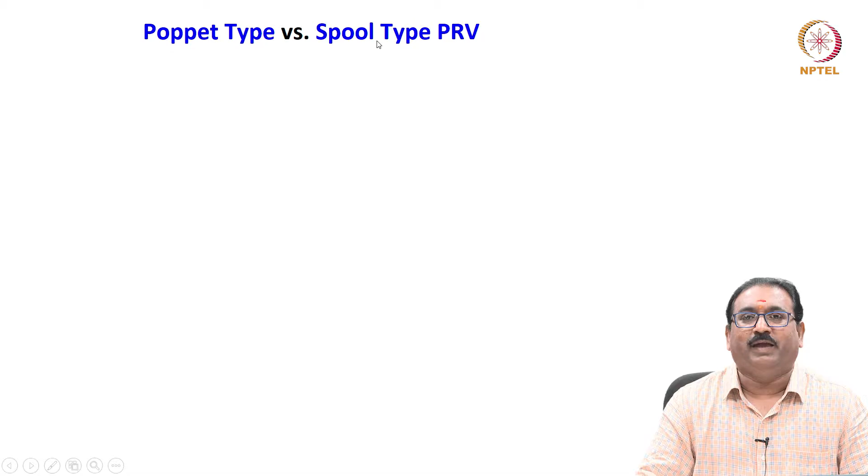Now quickly I will show you the poppet type and the spool type, what are the main differences. This is a poppet over the valve seat, here a spool over the valve seat. Initially the hydraulic balance is there, F hydraulic equal to FF. When this increases, then only it will lift, then flow will go into the tank, otherwise no. Same way for the spool.

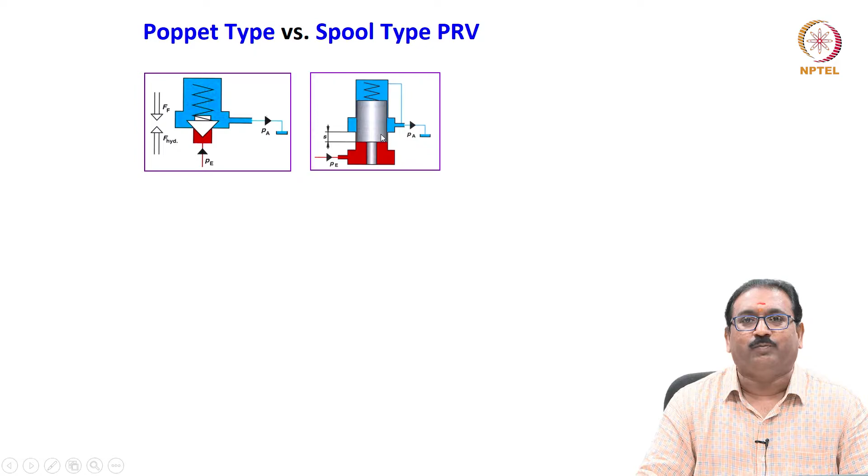The poppet type PRV and the spool type PRV, if you see, the poppet gives hermetic or leak-free sealing. Here oil will leak continuously via the gap between the spool and the valve body, meaning the spool is always moving inside and has a diametrical clearance. Through this oil will leak.

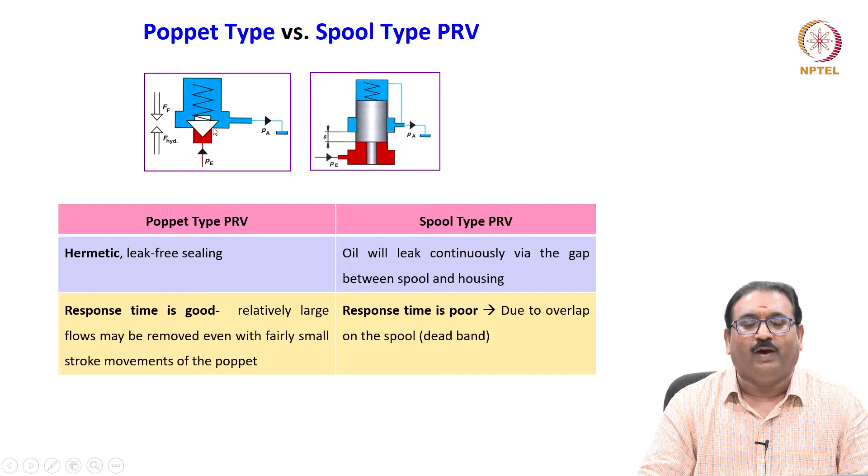Here response time is very good because there is only one moving element. A relatively large flow may be removed even with a fairly small stroke movement of the poppet. Here response time is very poor due to overlap on the spool, meaning a dead band, as you can see, the lap is provided. Until that, the valve will not open, which is why response time is very slow here. In the poppet, no need to worry, it will lift immediately, response time is very quick.

Apart from this, pilot controlled pressure relief valves exist because, as I told you, you have to set the pressure using a stiff spring on the other side of the poppet, ball, or spool. If you want to control very high pressure, for example 350 bar or 450 bar, the spring stiffness should be increased, meaning you have to use a very large spring with a very big diameter. Accommodating this in the valve body becomes difficult, because nowadays people are talking about lightweight hydraulics. Selecting a larger spring, larger diameter, very stiff spring is not allowed in lightweight hydraulics. In such cases, they go for pilot controlled pressure relief valves.

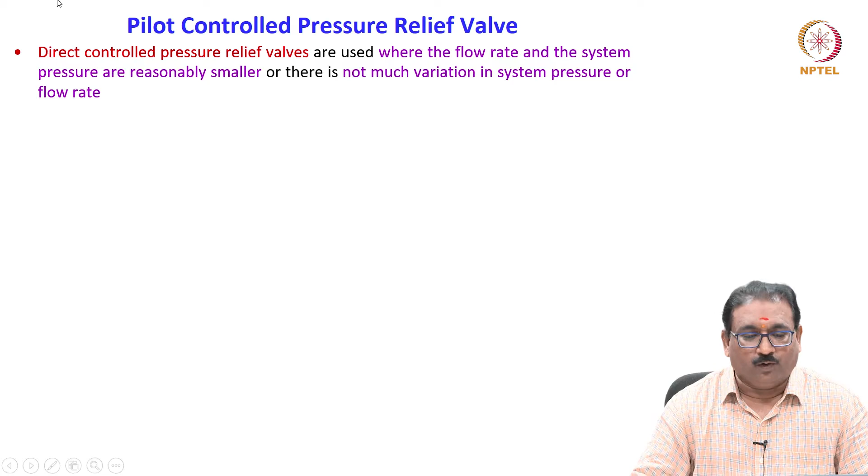As I told you, direct controlled pressure relief valves, which we discussed in the previous slide, are used where the flow rate and system pressures are reasonably small, or there is not much variation in system pressure or flow rate.

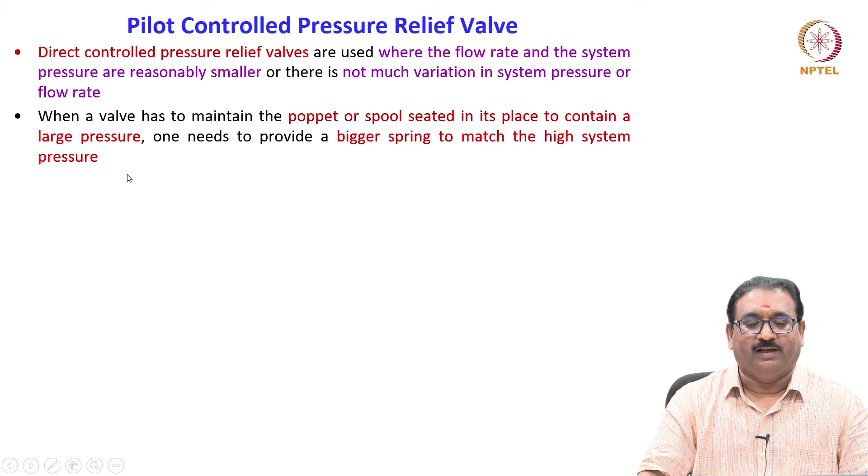When a valve has to maintain the poppet or spool seated in place to contain a large pressure, one needs to provide a bigger spring to match the high system pressure. We know that the bigger spring will have a higher spring rate with its attendant problems, and its cross section will also be larger, requiring more space and sometimes not being feasible at all in a compact hydraulic system as used nowadays.

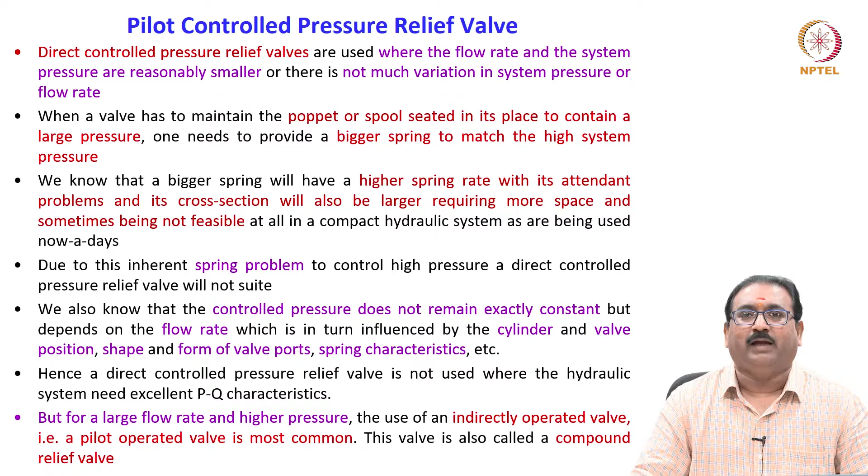Due to this inherent spring problem, to control high pressure, a direct controlled pressure relief valve will not suit many applications. We also know that the controlled pressure does not remain exactly constant, but depends on the flow rate, which in turn is influenced by the cylinder and valve position, shape and form of valve ports, spring characteristics, and many more factors. Hence, a direct controlled pressure relief valve is not used when a hydraulic system needs excellent PQ (pressure-flow) characteristics. But for large flow rate and high pressure, the use of an indirectly operated valve, known as a pilot operated valve, is common. This is also called a compound relief valve. Please understand, friends, compound relief valve is nothing but a pilot operated pressure relief valve.

Now let us see how this looks. First I will show you the poppet type of design, how it is controlled using the pilot. Here you can see the sectional views shown. A pilot operated pressure relief valve consists of a small pilot relief valve, shown here, and a main relief valve. There are two valves here. Generally the pilot is a poppet type, here it is a spool type, and here is what I will call the piston arrangement.

It operates in a two-stage process. The pilot valve opens when a preset maximum pressure is reached. When the pilot valve opens, it makes the main relief valve open.

Constructional detail: I have marked here the whole valve body which has the P port and T port. P and T, T is always blocked using this piston in a stem, with stem, correct here.

On the top you will see what is called a small relief valve setting. The poppet is fitted over the valve body, and this is adjustable type using the adjustment screw. Here you will see the spring, a stiff, larger spring compared to this.

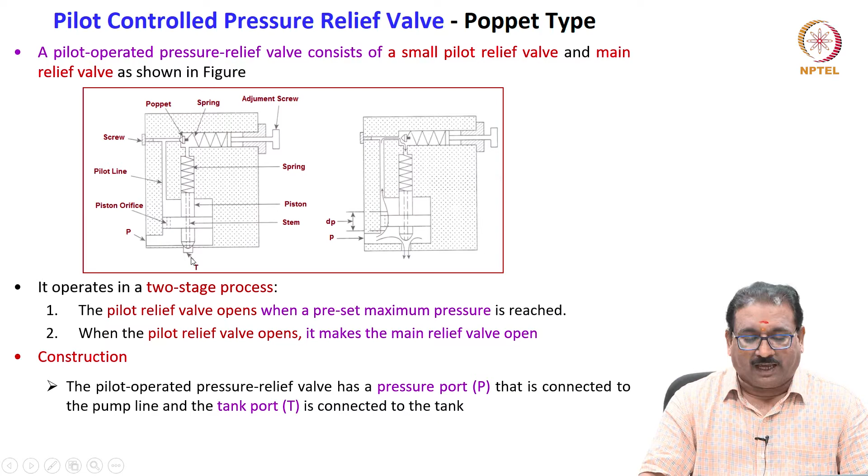In construction, the pilot operated pressure relief valve has a pressure port P connected to the pump line, and the tank port T connected to the oil reservoir. The pilot relief valve is a poppet type.

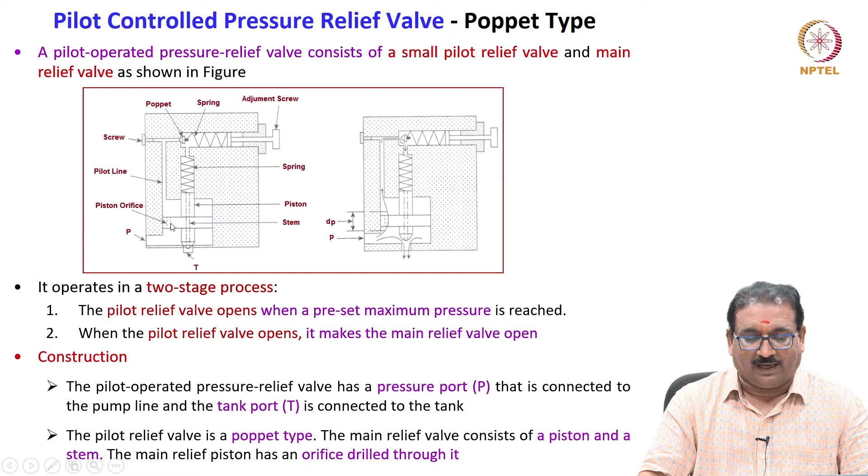The main relief valve, here, consists of the piston and a stem. The main relief valve piston has an orifice drilled through it.

The piston has equal areas, here you will see this area and this area fully exposed, meaning on the top side and the bottom side. The pressure going to the system is acting here.

The piston has equal areas exposed to pressure on top and bottom, and is in a balanced condition due to the equal force acting on both sides of the piston, this side and this side. The oil will enter through the piston orifice and then act over here.

It remains stationary in the closed position. Also, the piston has a light bias spring to ensure that it is always closed.

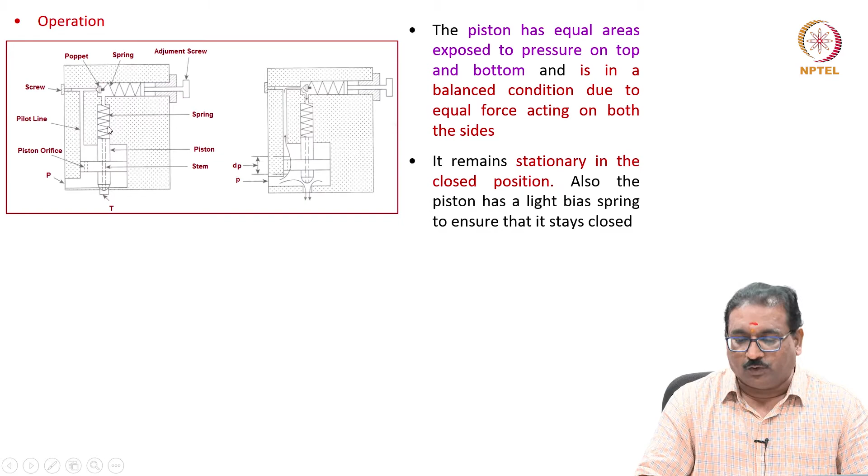When the pressure is less than the relief valve setting, the pump flow goes to the system, as I have told you. If the pressure in the system becomes high enough, it moves the pilot poppet off the valve seat. A small amount of flow begins to go through the pilot line back to the tank.

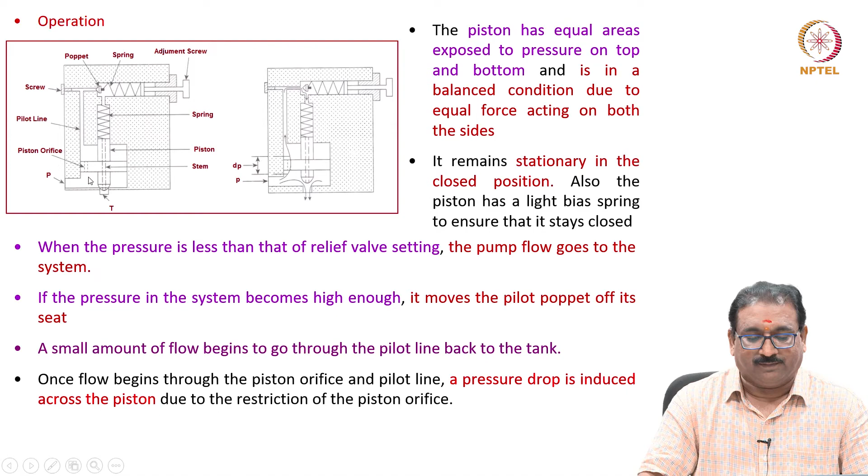Once the flow begins through the piston orifice and the pilot line, a pressure drop is induced across the piston here and here due to the restriction of the piston orifice. This pressure drop then causes the piston and stem to lift off their seats, and the flow goes directly from the pressure port to the tank.

Please understand how it operates. When the pressure here and here is the same, no need to worry. When the pressure increases here, what happens? The flow is also induced here.

Then this pressure will lift the valve element, and it will start leaking. Flow is going to the tank. Then the pressure differential between this and this will lift the piston and stem, and flow goes from P to T. This is the constructional feature and how it operates.

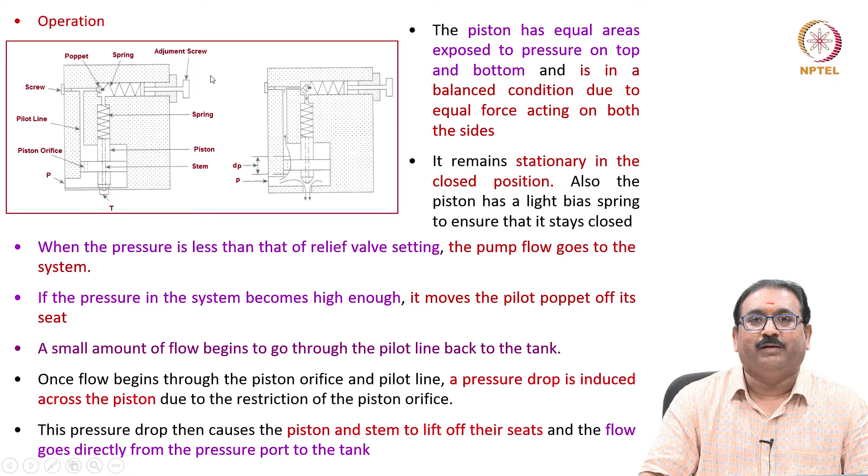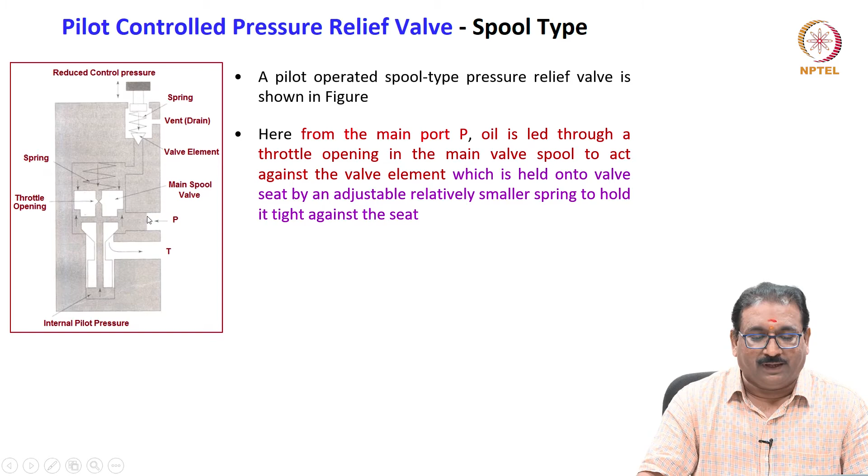When the pressure in the system increases, what happens? The increased pressure fluid is also available to the top side. Then what happens? It will lift, then oil leaks through this drain. Due to differential pressure here and here, it will lift the main spool valve here. Then P is going to the tank. This is similar to the previous one I explained.

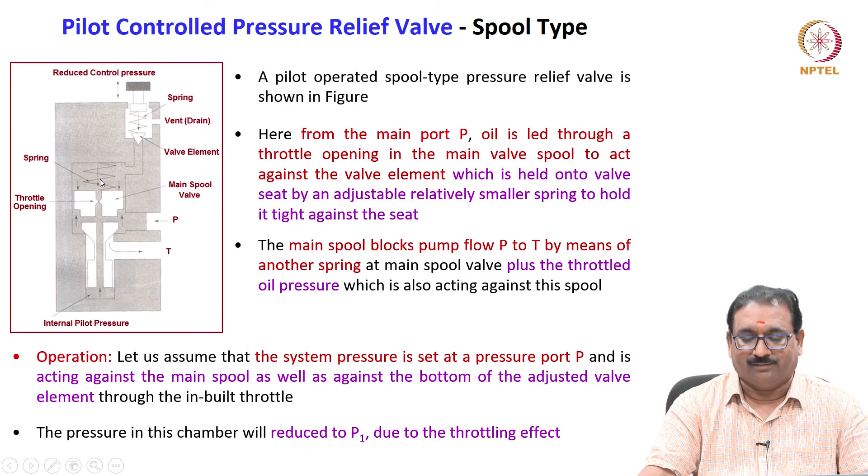Let us assume the system pressure is set at the pressure port P and is acting against the main spool as well as against the bottom of the adjustable valve element through the inbuilt throttle. The pressure in this chamber will be reduced to P1 due to the throttling effect, because here is fully exposed but here due to throttling. Therefore, the adjustable valve is to be adjusted to a force just above or equal to the oil force commensurate with the pressure P1, and this equilibrium will continue till the main system pressure does not cross the valve setting here.

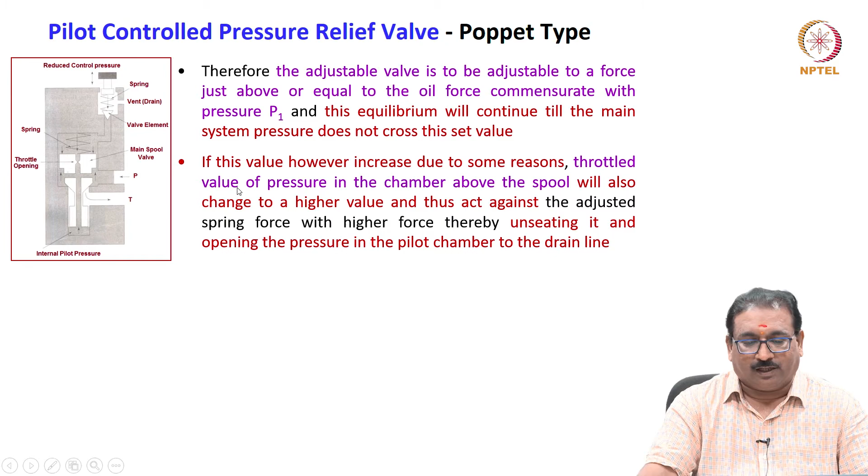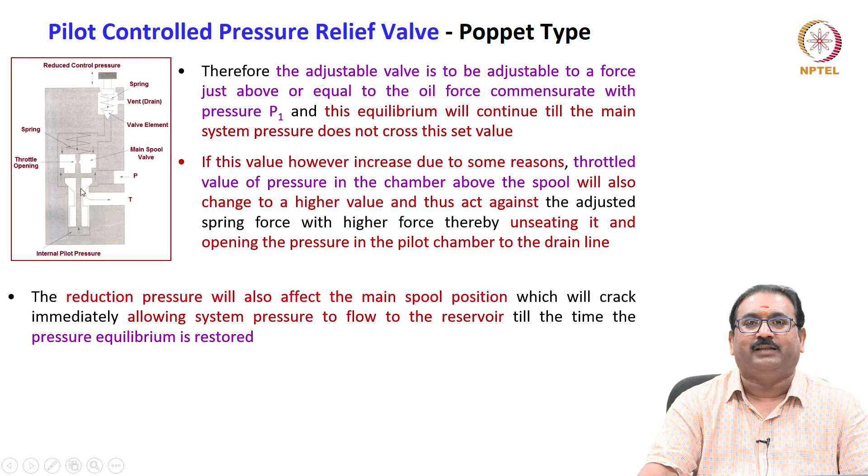If this value increases due to some reason, the throttled valve of the pressure relief valve will open. Then what happens? The reduction in pressure, meaning delta P here and here, will lift the spool and the valve stem. Then flow goes from P to T.

After knowing this, now I will explain this unloading valve in one particular application which is used to control the double acting cylinder. This is a double acting cylinder connected to the 4x3 directional control valve, closed center, push button actuation, spring centered, and this is connected to power source 1, here a low pressure high flow pump, and one more is the high pressure low flow pump.

Here I am connecting one relief valve in which I am opening this valve by monitoring the pressure level here, that is the unloading valve. I am setting the pressure here in the spring to 50 bar, and here directly I am feeding the pump flow to make the valve open. It is a pressure relief valve. Here I am setting the pressure to 250 bar. Then both are connected to the tank. Please note, friends. Then we will see what happens when I push this button and what happens if I push this button.

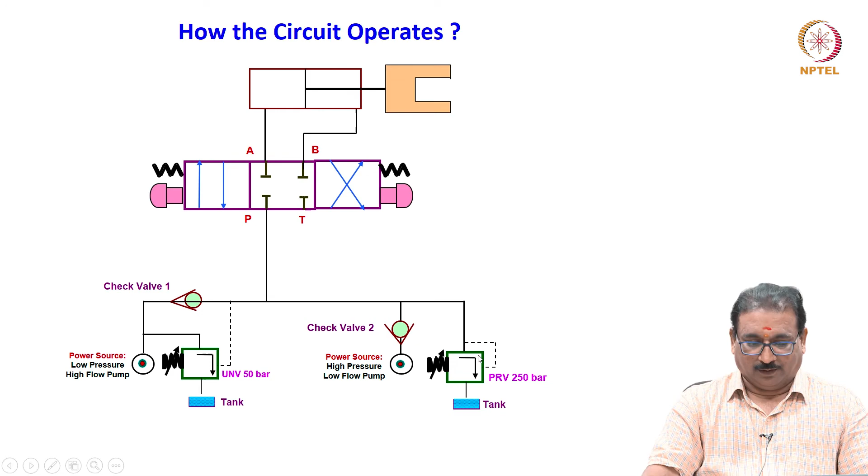What is the role of these two relief valve settings, we will see now. At center position, no need to worry, friends, correct. All the flow will come here and accumulate here, correct. It is not an ideal situation because energy will go to waste.

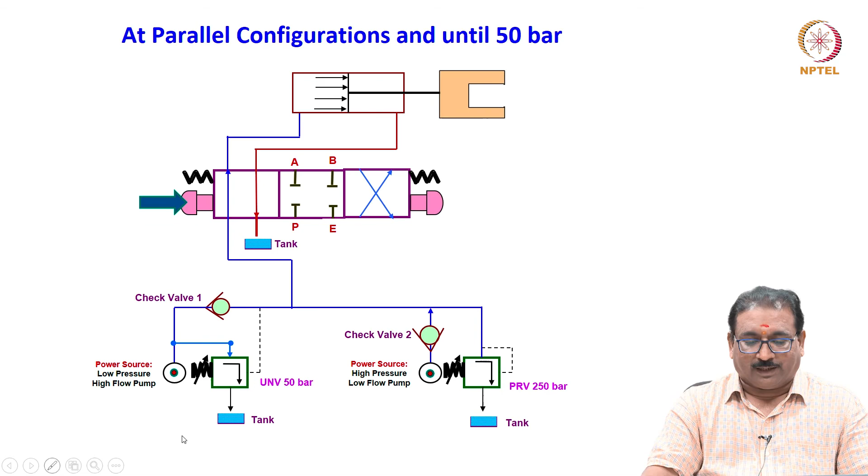But at parallel configuration, when I press this button, what happens, friends? The actuator end will receive flow from the low pressure high flow pump as well as the high pressure low flow pump. Flow will come from both. Then it will move very fast because both send flow to the actuator, until how many bar? Until 50 bar, because I set the 50 bar setting here. After reaching the 50 bar setting, what happens? Automatically this will open, then whatever flow is coming from the low pressure high flow pump will go to the tank.

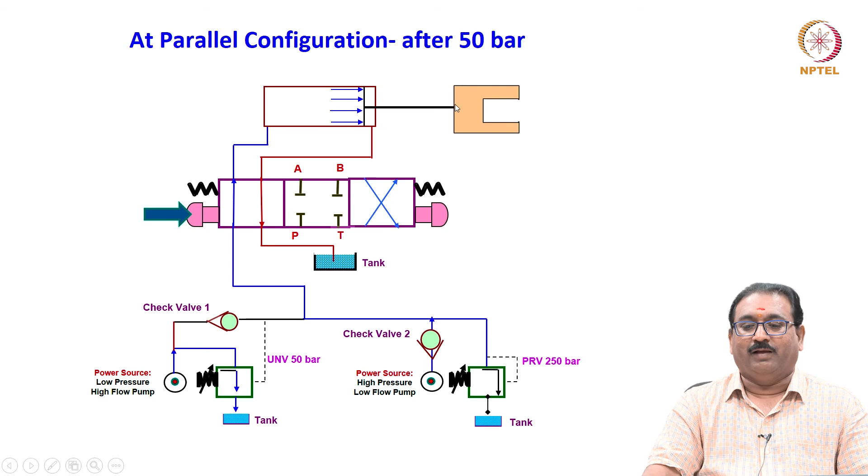Only the actuator, after reaching, will receive flow from the high pressure low flow pump. Then it will move very slowly compared to the previous one. Until how much is it? Until it reaches the pressure setting of 250 bar.

But when you press the crossed configuration, what happens you will see, friends, both pumps will send the flow. Then the actuator will retract very fast, until how much? Until it reaches 50 bar. Once it reaches 50 bar, it will divert the flow. Then how much pressure will it reach? After reaching 250 bar, it starts unloading.

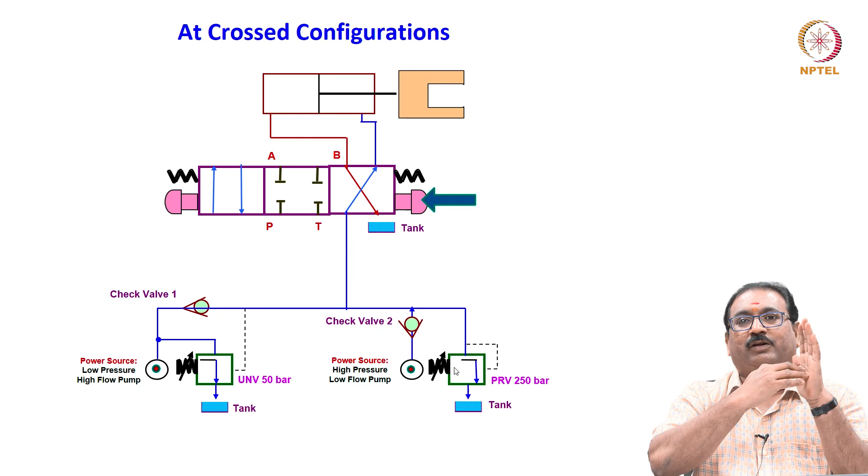Meaning, when the actuator is somewhere else, I want to move the actuator very fast; that time I am receiving flow from the high flow pump and low flow pump. After reaching the workpiece, I want to do the particular operation, I have to press very slowly; that time I am receiving flow from the low flow pump alone, and the high flow pump is sending flow to the tank. That is the role of the unloading valve.